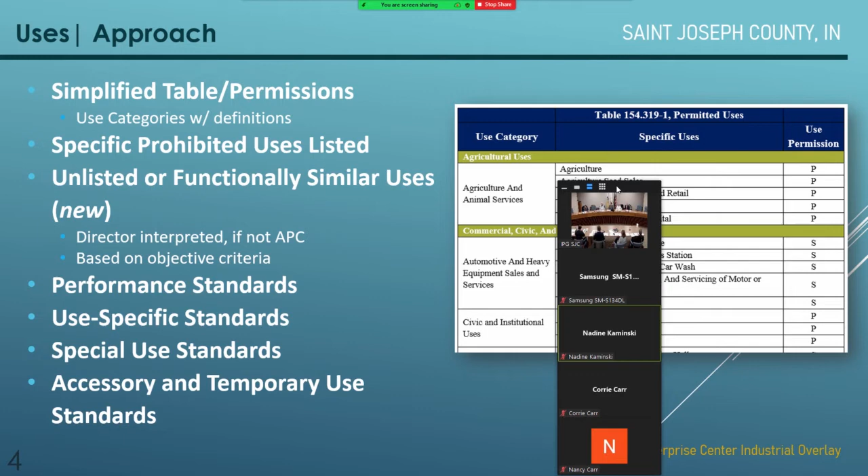So we've taken an approach to drafting this to simplify things, to make it easier to use. One of the ways we did it was looking at the use table and defining all the specific permissions by use. So instead of a list, we organized it using what we call use categories, bunching similar uses together where you have a category and then the specific uses listed next to it, as well as their permissions.

And then we also have a list of specific prohibited uses. These actually reflect the uses that were part of the resolutions. And something that's new to the county is a mechanism to determine if there is a proposal for a use that is not listed - a set of criteria that you can use to determine if it's functionally similar, allowing for a determination by the zoning administrator or the director.

It's based off objective criteria. There's also a set of performance standards, many of which we've carried over from the existing county ordinance, but also some new ones, such as the vibration standards table. We've added other standards here, which I'll mention in a moment. The conditional uses and special uses have specific standards and criteria they have to meet, in addition to those already outlined in the county code. Then there are standards for accessory and temporary uses.

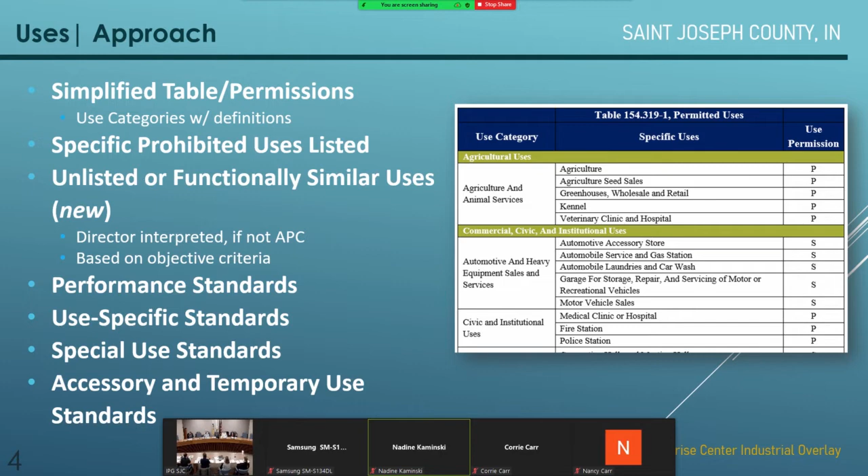So the uses are categorized by permitted by right, conditional use, and special use. I mentioned the prohibitions by resolution—these are uses producing nuisances and external impacts. Think of slaughterhouses, mining, anything that would create that externality.

For unlisted and similar uses, there's criteria built in for flexibility and decision. The administrator, or director, would have the discretion. But if it's not authorized, then it's prohibited.

I mentioned the use table, where we categorize similar uses as a use category, with the specific uses alongside, and then the actual use standards referenced by its permission. The use categories are organized by agricultural uses, commercial, civic and institutional uses, industrial uses, and accessory and temporary uses. I also mentioned the performance standards, which all uses have to meet.

You have noise, and we refer to the existing standards for noise. Vibration is new. For air quality and toxic substances, we refer to state and federal regulations. There are exceptions—it provides for noise exceptions between 7 a.m. and 7 p.m. related to the permitted uses. And we have a methodology for measuring these standards within the overlay.

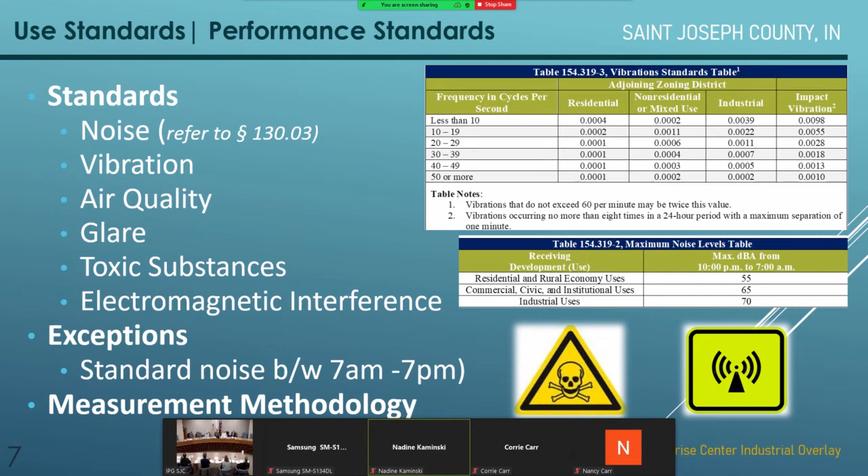In terms of dimensional standards—the lot, and how buildings sit upon the lots—we carried over the recommendations from the guidelines, working together with the work group and staff to see what actually works for the district. Those are outlined in the table.

We also require 20% open space and are recommending a 75% maximum lot coverage. Within that open space, we have standards related to what is permissible—what type of uses qualify as open space and what doesn't.

In terms of building setbacks, we wanted to make sure we still kept the rural element, but in a way that protects the overall character. So we're recommending a 50-foot setback. One key part of that is setting a parking setback requirement.

So there's a buffer between the street and the parking, limiting the amount of parking between the street and the building, so it's not a big parking lot—so when you drive down the road, that's not all you see. I'll talk about that in a second.

There are also permissions for height staying at 60 feet, but for every foot above 60, there has to be an extra 2 feet of side and rear setback. That's up to 90 feet.

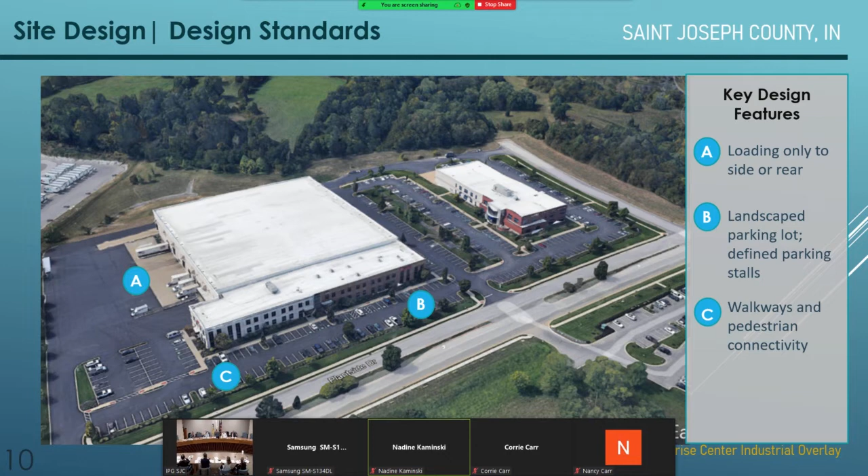The building design standards is a feature of this too, in terms of trying to meet a high quality aesthetic.

We've broken this up into 3 scales of buildings: small, which are 50,000 square feet and under; medium, between 50,000 and 200,000 square feet; and large, anything over 200,000. We had back and forth discussions with the work group on where that threshold was, and this is the sweet spot we landed at.

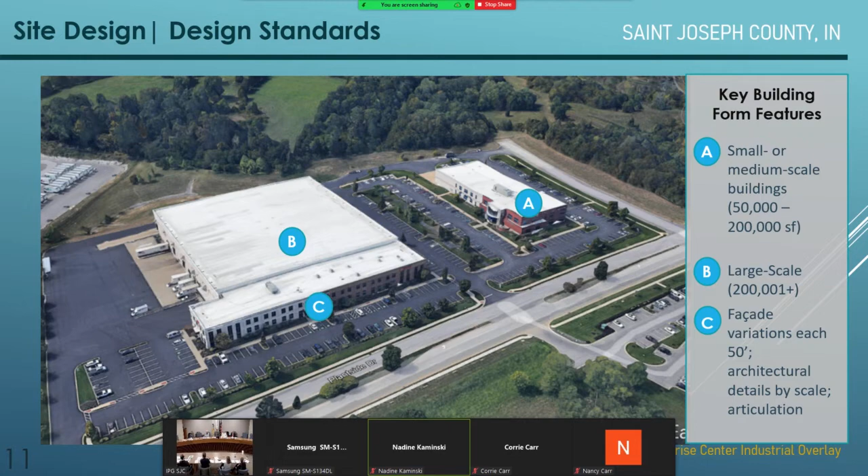The idea is to identify different treatment for those buildings so you can break up the mass of the larger buildings, so you're not just a large standalone industrial warehouse, and break the facades up into 50-foot increments with different treatments to kind of humanize that space related to the public realm.

I'll show you what I mean. On the small buildings, you want horizontal projections, like a canopy or something that breaks up the vertical as well as the horizontal component. Putting dormers with ridge lines, breaking the buildings into 3 parts - a bottom, a middle, and a top - providing for parapet walls or towers. Any of these would be part of breaking up that space, so every 50 feet include one of these elements.

Other features help reduce the mass. These aren't law, these are standards that help provide a way to design the facade every 50 feet. For anything over 200,000 square feet, we focus on defining the entrance as well as any vertical element like towers, to provide some visual interest.

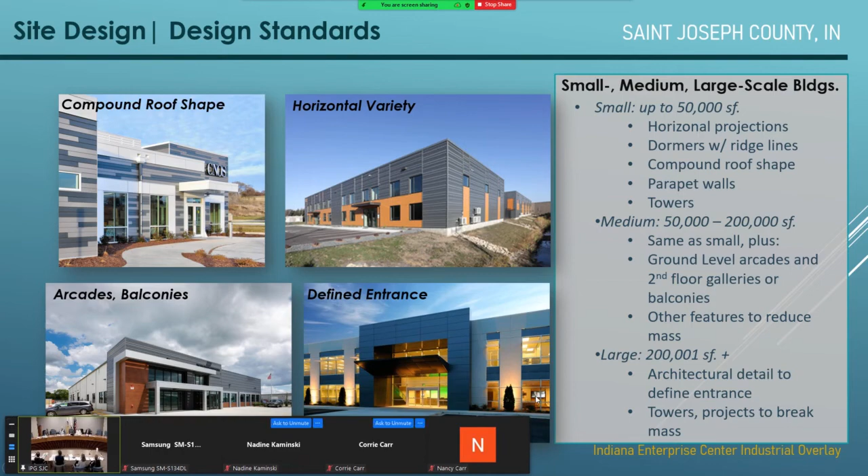We mentioned the articulation, ensuring there are windows or doors every 50 feet, as well as the horizontal elevation, and treating the roof, breaking it up so there's articulation along that span of space. We also outline the different building materials - brick, steel, stone, and metal as preferred - but within that, different ways of treating those materials.

Focusing on the primary entrances, using treatments such as canopies, awnings, arcades, et cetera. Then identifying fencing and how it relates to the property, ensuring it's done in a way we recommend - I think black vinyl or black PVC, railless - the idea is that the fencing should just blend in with the landscaping, with an 8-foot minimum or maximum height.

The landscaping is something we worked closely on, not just with staff but also experts in the community, to figure out how to integrate best practices, specifically the use of native plants and native planting. We have a requirement for at least 50% native plants, including native cultivars, with conservation of the existing landscape as the preferred method for landscape treatment. This would be included as part of the landscape plan.

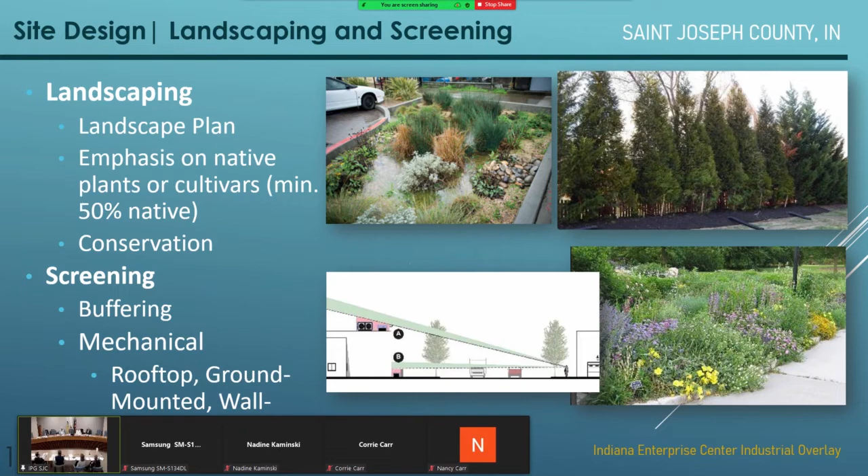We also have provisions for screening of mechanical equipment, whether rooftop, wall-mounted, or ground-mounted. This could be through landscaping or fencing, but every piece of equipment would need to be screened.

We have signage and wayfinding standards, referencing the existing standards but addressing lighting on signage as well as sign types like a monument sign, ensuring there's landscaping at the base. We also permit a master sign program, as part of an organized district, which would be recommended to create a consistent character throughout the district, as well as wayfinding on-site or throughout the district. There are standards in this that guide that process.

And I mentioned the sustainability element - the sustainability incentives function in a couple ways here.

First, there are required elements, basic required elements, and these would be required for all applicants in the IEC. And then every applicant would have to meet at least 3 points in the menu.

And the menu is broken up into a variety of options, different categories. So there's an alternative energy and energy conservation category, with incentives listed under that. There are opportunities to gain points if the building is going for LEED certification. There are transportation incentives and water conservation.

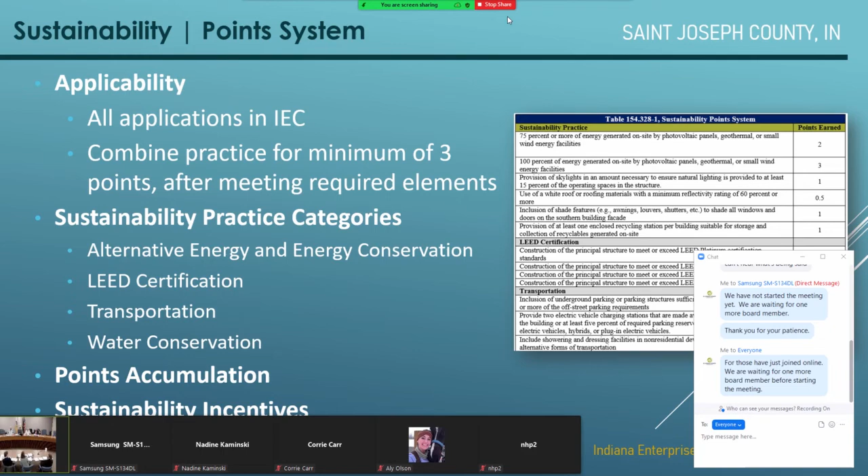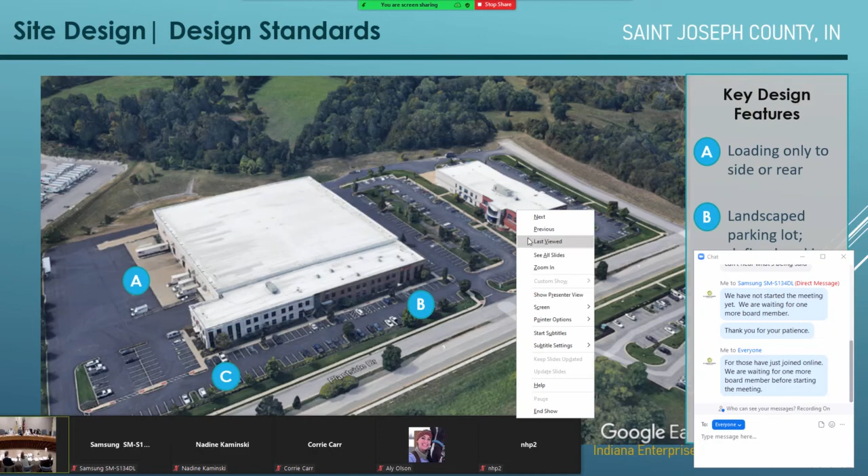Shelley, could you click back for me to the mapping slide? It should be 2 or 3. While Shelley's getting there on the slide, I'll just say that this is an identical set of standards for the Town of New Carlisle's zoning ordinance. A portion of the IEC core development area, shown in purple on the map, is within the town limits. So this is just adopting the same language that we went over into the town's zoning ordinance.

So do we need to have a presentation, or is that? So this is to the town council, not, correct? Correct. Yes, this would go to the Town Council of New Carlisle, and if the staff would prefer to officially incorporate their presentation from petition 1 for this one, they would not have to go over it again.

I mean, Steve's here, no, I'm joking. You can have it all over again, but yeah, the town did hear about this in an executive session earlier today.

If there's nothing else we want to add, I will open it up. Being that this is pretty much identical to petition number 1, going towards the Town Council of New Carlisle, is there anybody here wishing to speak in favor of this petition? Please come forward and state your name and address. Seeing none, anyone online wishing to speak in favor of this petition, please use the raise hand feature or enter in the chat. Seeing none.

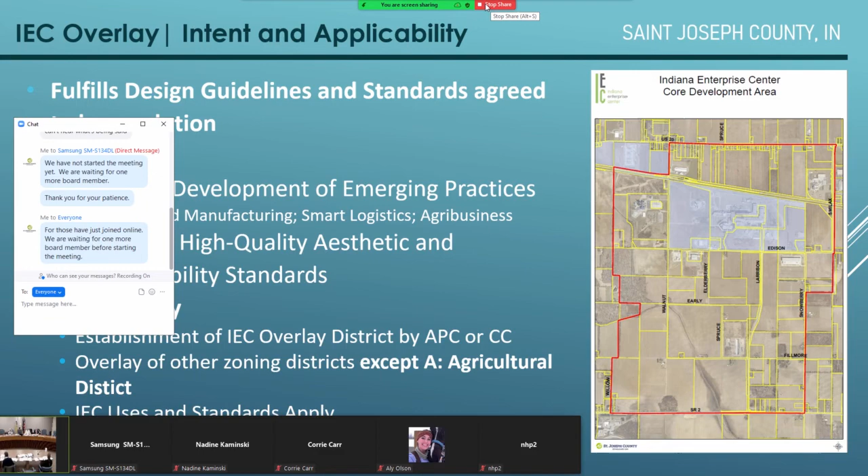Good evening, this is Sean Klein, Area Plan Commission staff. So it's pretty self-explanatory. This is a text amendment to add highway garages as a special use in the R Single Family District. This is in recognition that there are areas in the county that may be in need of highway garages, large swaths of land that are zoned R Single Family District but would be appropriate locations for highway garages. Currently, highway garages are permitted in the I and C districts as permitted primary uses, and as a special use in the A agricultural district.

But areas zoned R single family that would be appropriate for highway garages might not be appropriate for the full array of potential future uses that would come with rezoning to I, A, or C. This would still have the safeguard of the special use review process with the Area Board of Zoning Appeals and the County Council to ensure it is an appropriate location and won't have any adverse impacts on residential development in the area. So happy to answer any questions.

This requires a public hearing? Yes.

Thank you. Any other questions by commission? Could you define a little bit, clarify on the maintenance shops?

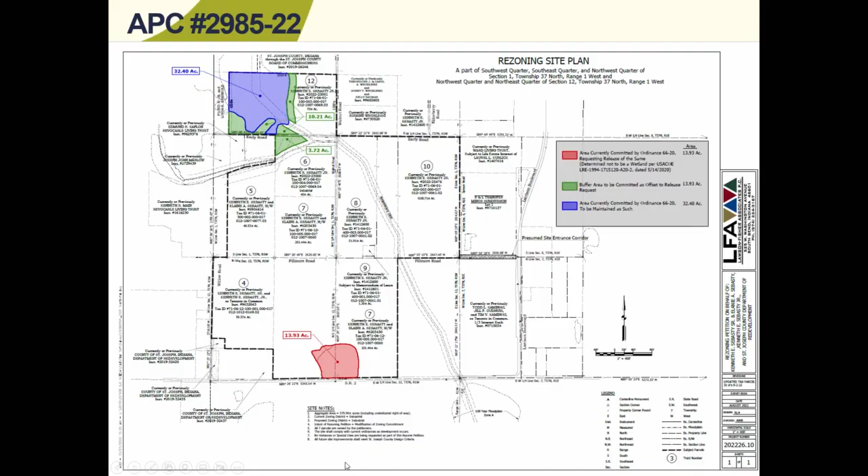Seeing none, anybody present wishing to speak against this petition, please come forward and state your name and address. Didn't see any. Anybody online wishing to speak against this text amendment, please use the raise hand feature. Seeing none, I will now close this to the public.

Any last comments, concerns, or questions by the commission? Otherwise, may we have a motion?

Move we approve the text amendment, sending it with a favorable recommendation. Where are we sending it? To the county council. Bob Holly, I'll second that.

We have a motion and a second to send the text amendment, I guess we don't have a number, do we, with a favorable recommendation to the county council. All those in favor, say aye. Aye. All those opposed, same sign. Motion carries.

Couple items for miscellaneous, not requiring public hearing. Abby? Yes, we have approval of the Area Plan Commission and Plat Committee calendars for 2023.